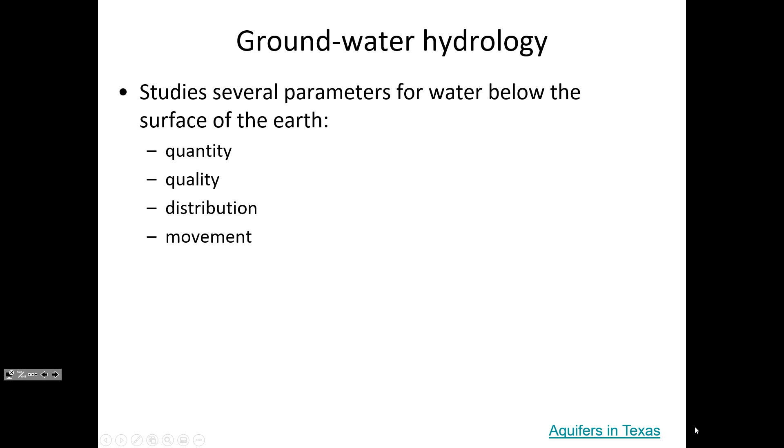And what's significant about subsurface hydrology is that there is so much fresh water underneath the Earth's surface that it's a really important source of water, both for domestic use but also for industrial purposes, and even in some cases commercial use like cooling at power plants. And so subsurface hydrology would concern itself with the amount of water that's available, sometimes the quality. There are applications of subsurface hydrology that look at how pollutants that have seeped underground will move from place to place because of the movement of the water that carries them.

And just like there are important models used in surface hydrology to link together the relationship between rainfall quantity and runoff amount, there are also models in subsurface hydrology that link together things like rainfall recharge and how the groundwater table and the aquifer movement from place to place varies over time. And so there are finite element models that divide the underground environment up into a three-dimensional mesh, and there can be different properties for each element in the mesh. They'll assign different hydraulic conductivities, and then they'll look at the flow of water in and through those boundaries.

One of the big problems that has emerged is the fact that groundwater tables are getting lower across the United States as agricultural users extract more water from aquifers than the surface is recharging.

And we'll look at a couple of YouTube videos today just to introduce us to the subject of subsurface hydrology, and I think you'll notice that a consistent theme of those videos is just concern over the fact that as populations are growing, the amount of water that can be extracted from underground is declining because the areas that have good availability of infiltration are reduced. When you have a lot of impervious area in a watershed, then that reduces the amount of water that can get into the subsurface, and so that's taking the infiltration lower than it was before.

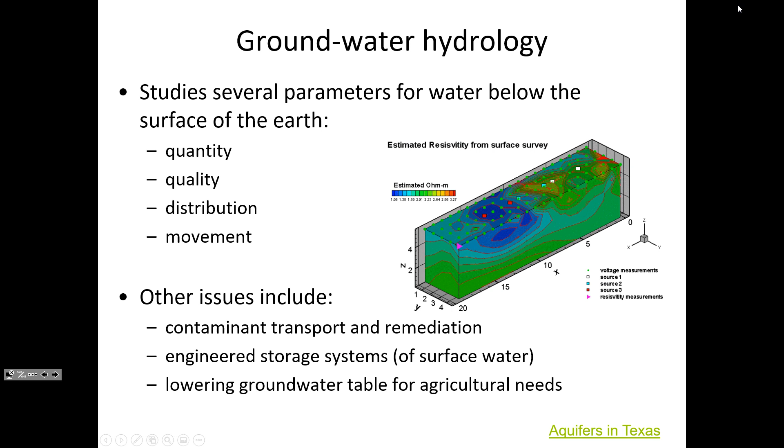And then another aspect of it is that there is a lot more pollution getting into the underground aquifers than there was previously, and so that sometimes makes it a challenge if you're going to use groundwater for drinking. In some past years, maybe it would be possible to take water straight from a well and put it into a distribution network, but it's becoming increasingly common that groundwater that's under the influence of a polluted surface water has to be disinfected, where that may not have been necessary in the past.

All right, so this first video is made by the Texas Water Development Board, and it talks about aquifer issues specific to Texas, which is kind of a good indicator for where a lot of the rest of the country is going, because Texas has growing populations and, as a southern state, is maybe more exposed to variability in the climate than some other places. And there are some aquifers, particularly in El Paso, where I remember reading the doom and gloom articles about how the aquifers were just about completely used up. As much as 5-10 years ago, they said there's only 5 or 10 years left, and they're finding ways to draw that out and reduce the dependency on the aquifers.

But the point is, Texas has some really important issues, and if we can learn from what they're doing in Texas to manage water availability and preserve aquifers, then a lot of the other places that are less threatened can benefit from that experience. So let's watch this video.

Okay, we're going to look at something similar in the slides that follow, but it's maybe not as clear as it is here, so I wanted to pause and show you that what we're actually looking at is two different kinds of aquifers. This aquifer is confined, meaning that there is a layer that's relatively impermeable both underneath and above. And so this is just soil that has water in it. It's a conceptual diagram. If you were to actually have a side view, it would just look like soil because the water itself is clear, it's not blue. Here's the ground level. Now this is soil that has some water in it, but the pores aren't fully saturated, and this is where the pores are fully saturated.

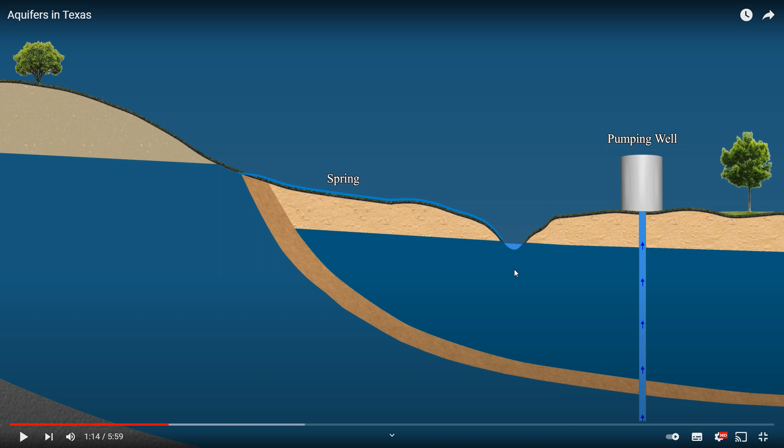But this is a confined aquifer, and then what's above it is an unconfined aquifer. And so there can be multiple layers. If you go downward 2-3 kilometers, you may pass through different aquifers that are on top of each other, and then a very thick layer of rock, and then beneath that may be another aquifer. And so we can't just think of there being a single aquifer or a single aquifer layer at any particular spot on the map, because the important regions go downward, and there can be these different layers. All right, so let me continue the video then.

Okay, one of the things that it talked about in that video, just very briefly, was brackish groundwater. Is anybody familiar with that term, brackish? Let me see if I can get to the spot where they were discussing it. It just came on screen so quick.

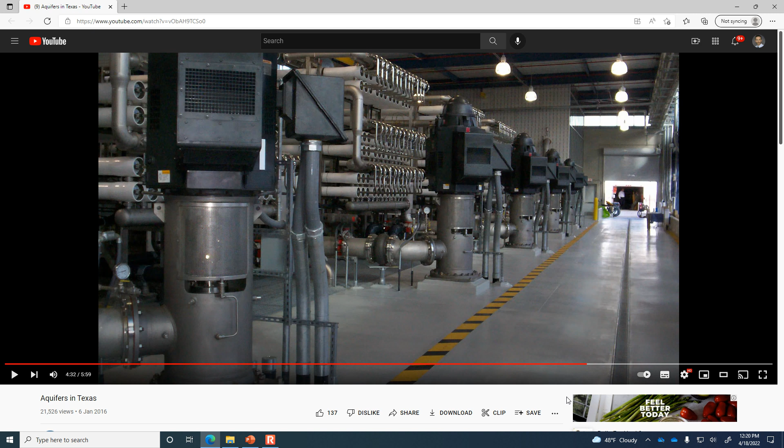Well, here it is. Okay. These tubes are reverse osmosis units used in desalination. And brackish water is water that has high salinity, typically sodium. And a lot of that sodium comes in from saltwater intrusion.

If we look at the map of the major aquifers that they've got in Texas, this Gulf Coast aquifer, you'll notice, is just up against the Gulf Coast. And when you're pumping groundwater out, then some of the water that comes back in is from the surface, infiltrating down, but also the seawater can penetrate inland. And so, especially in coastal areas, saltwater intrusion is a real problem, where if you're pumping out the fresh water, then that creates a low point in the groundwater table, and water from the sea will begin to penetrate.

And so coastal communities that rely previously on groundwater can suddenly find that their groundwater is no longer fresh, that it becomes salty. And so it's not an all or nothing proposition. It's not like suddenly they find it has the same salinity as seawater, but over time the concentration of salt in the groundwater begins to increase, and there may come a point where they have to start extracting it.

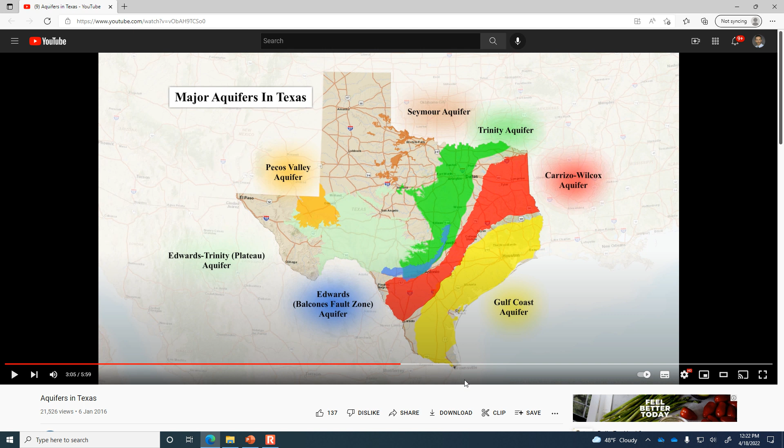And so reverse osmosis is one of the approaches to do that, where they'll use high pressure pumps to force water through membranes that have very small diameter pores, and the pores are small enough that it'll allow water molecules through, but it will filter out salt. And so it's very, very expensive, and just one of the issues that they're trying to avoid when it comes to preserving the productivity of the aquifers.

So if you look at the overall quantity of water on Earth, most of it is in the oceans and isn't easily used because of the salt that is in seawater. And of all the fresh water that exists on Earth, most of that is also not usable because it's in ice caps, meaning, it's fresh, but it's so far away from where the people are that it's not generally considered practical to use water that's in the ice caps, or water that's in glaciers is permanently frozen.

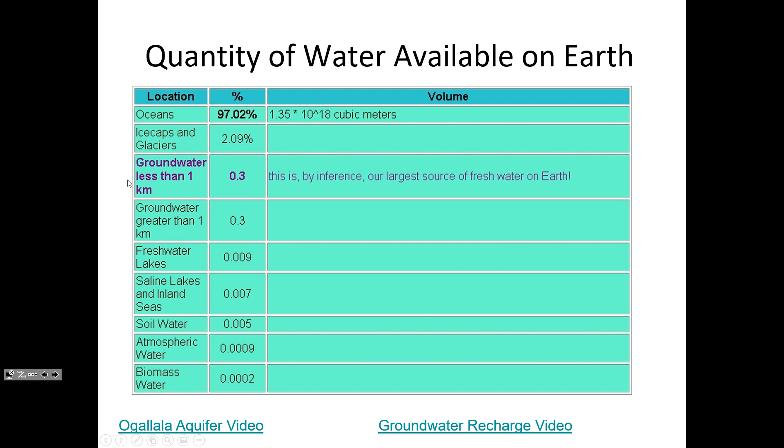And so most of the fresh water that we can access would be water that's relatively close to the surface. And so 0.3% of the water in Earth's environment, if we think about it as a control volume and we're looking at inside the atmosphere, where is the water that we could use, only a tiny fraction of it is closer than a kilometer to the surface.

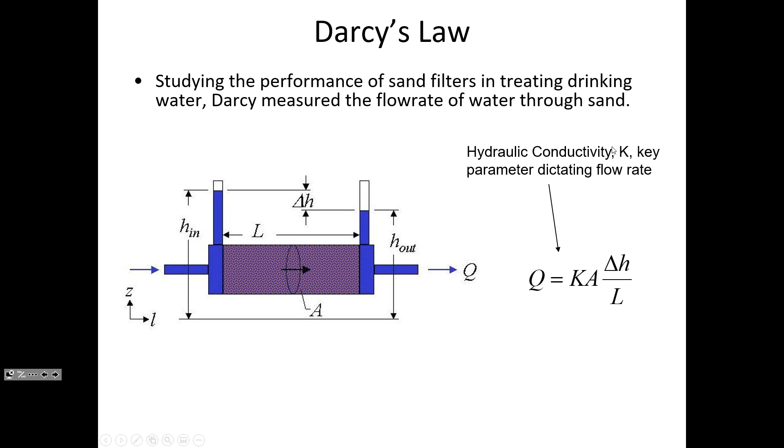And so this proportionality factor K is also important when we talk about well equations, when we try and predict how much water can be extracted from a well based on the shape of the cone of depression, the shape of the water surface as the water is approaching a well. So this hydraulic conductivity, which we've seen before, will be an important factor when we look at the well equations.

In hydrology terms, the cone of depression is the water table which gets lower as you get closer and closer to a production well. There's two different kinds of wells, a production well or an observation well. If you're digging a hole in the ground and you're just keeping track of the water level at that location, that would be the observation well. But a production well is where you're extracting water from the aquifer at the location.

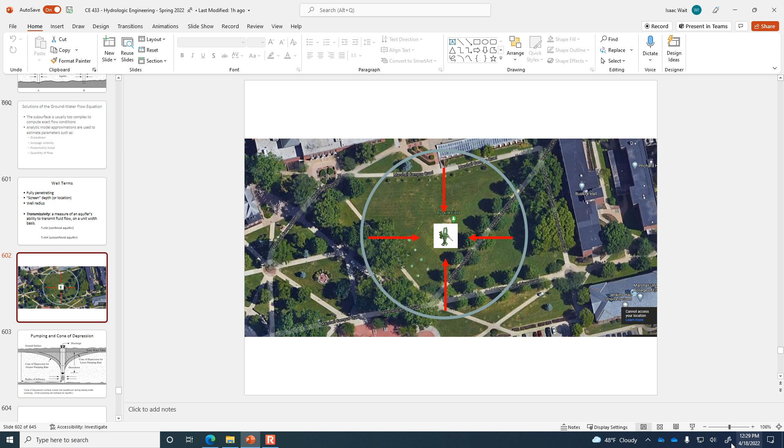When I talk about the radial movement of the water, if we had a well that was set up in Buskirk Field, maybe just one of those old-timey hand pumps, then it would be bringing water to the surface, and to be able to have more water as you continue pumping, the water would be moving towards the well in all directions. So it would kind of have a circular

influence, and the closer you get to the well itself, the lower the water table is, and that's why the water is moving from the outside towards the center. Remember, water flows downhill, and that's what the cone of depression is: the downhill movement of water. We wouldn't see in a free surface a water surface that's quite this steep, but because it's a porous medium and water has to seep through small diameter grain voids, we can see a relatively steep slope.

And what we're able to do is measure a certain distance away from the central axis of the production well. We can find out what the depression looks like, how much of a drawdown there is at a certain distance away, and then at another location. And if we have the drawdown at two locations, then we have formulas that will allow us to predict the rate of flow that you can get from a well by observing the cone of depression.

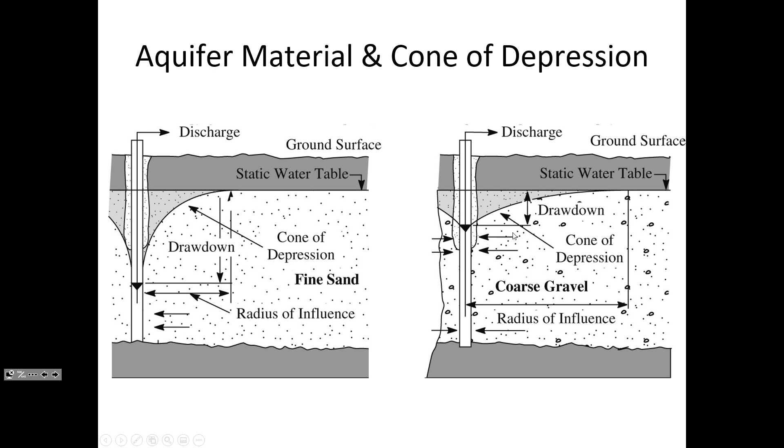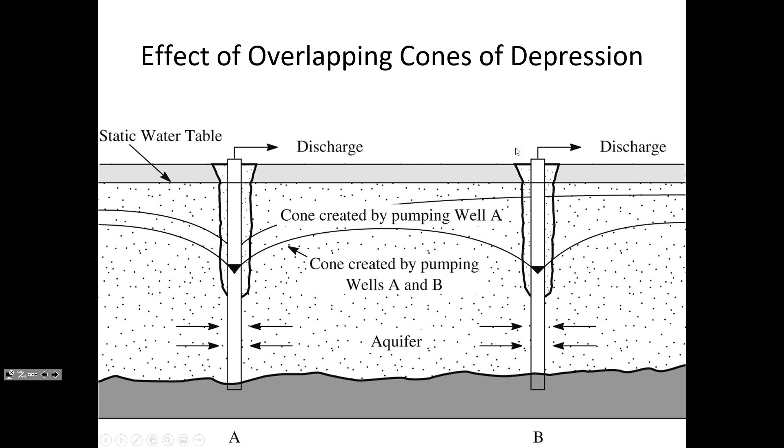And when you have two adjacent wells that are both bringing up water, there can be overlapping cones of depression that cause the drawdown to be even lower than it would otherwise be. In both of these wells, the static water table was here at some elevation below the surface. If you were only pumping well A, it would bring the cone of depression down a certain distance, but the influence of having an adjacent well would bring it down even further.

When we have wells that are extracting water, a fully penetrating well is one where it goes all the way through the entirety of the aquifer thickness. And so we're assuming that water is free to move towards the well through the entire aquifer thickness, because we've screened, meaning that there's openings in the pipe casing so that water could enter the well at all of the different elevations.

The radius of the well is important because, remember, I mentioned that the equations we're going to use to predict the flow capacity for a well look at this drawdown at a certain radius away from the well. And one of the locations that we can measure the drawdown is at the well itself, which saves us from having to have two separate observation wells. We can have a production well and one observation well, and just with those two, predict what the flow rate is able to be based on the drawdown that we're observing.

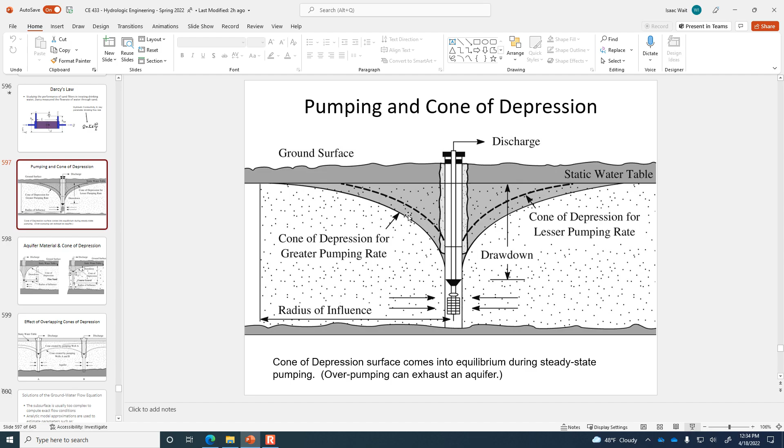Now, I've already refreshed your memory about the parameter of hydraulic conductivity, but a related term is transmissivity, which is where you take into account the thickness of the aquifer and its hydraulic conductivity. And so here, whether it's a confined aquifer or an unconfined aquifer, you could talk about the transmissivity of the aquifer, and K has units of length per time. So hydraulic conductivity would usually be centimeters per second or meters per day.

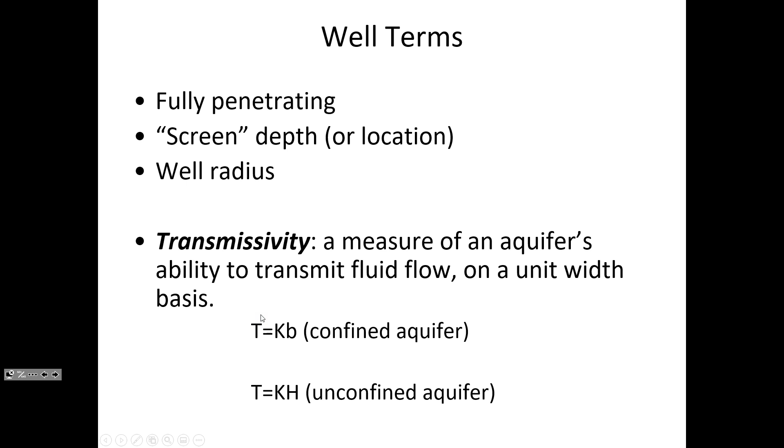It's a speed, in other words, where the aquifer thickness is going to have units of length, and so transmissivity is a flux. It has units of length squared per time. And so it would be meter squared per day or centimeter squared per second, potentially. But we just simply multiply the thickness of the aquifer by the hydraulic conductivity, and then we get the transmissivity, which will go into the equations we use for trying to describe the shape of the cone of depression.

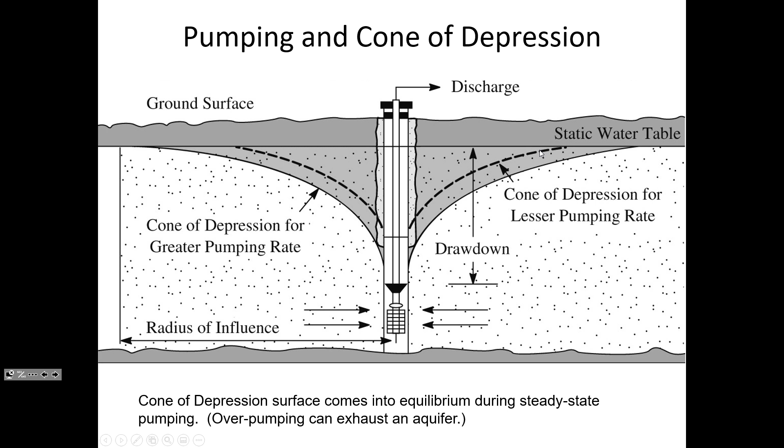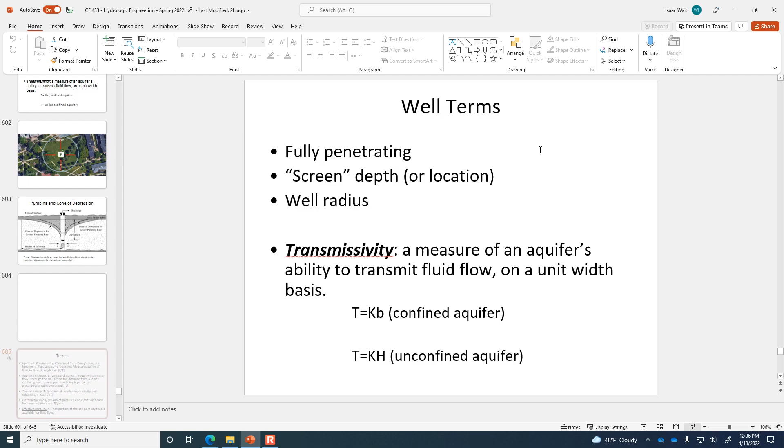We've talked about hydraulic conductivity, the thickness of the aquifer, transmissivity. In a confined aquifer, we're not actually observing drawdown of the physical location of the water, but we're observing drawdown of the piezometric head. I don't have a marker. Let me go to this side view of this aquifer. So if we started to extract water from one of these wells pretty consistently, then if it's an unconfined aquifer, you'd see the physical location of the water starting to draw down.

But in a confined aquifer, it won't be the water surface that draws down at first. It would be simply a reduction in the pressure of the water in the vicinity of the well casing. So this term here, the piezometric pressure, is the sum of the elevation and the pressure head at a certain location. And so inside the confined aquifer, you'll remember back to fluid mechanics, we talked about piezometers.

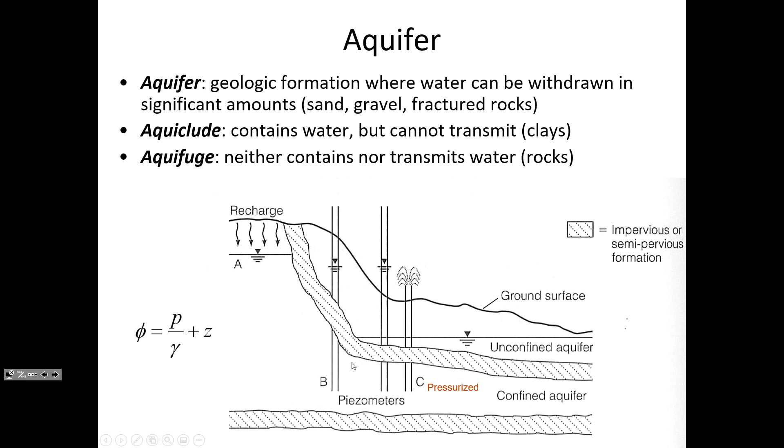A piezometer, if you connected it to a pipe, is a way of measuring the pressure, and you're puncturing the pipe and allowing the water level to rise to a certain elevation, which represents how much pressure there is inside the pipe. And so the same thing is true with an aquifer, that you can puncture it, connect a tube of some sort, and the water level will rise, indicative of the pressure inside the confined aquifer. So it will be that piezometric pressure which is reduced in a confined aquifer, where it's the physical water height that will be reduced in an unconfined aquifer.

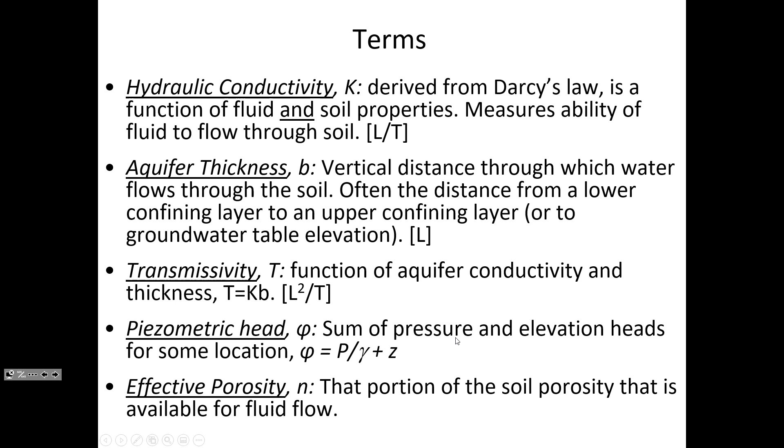And you'll remember the difference between porosity and effective porosity, that some pores may not be interconnected, and so although a given soil may have lots of voids, it's the interconnected voids that are effective for porosity that we have to keep track of when we're talking about movement of water through the subsurface.

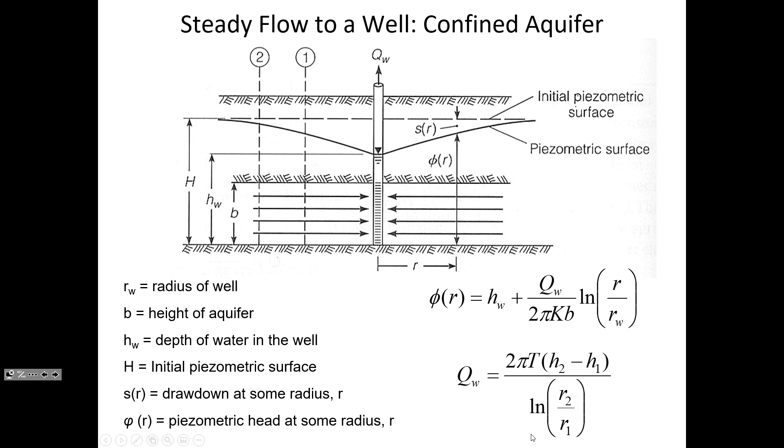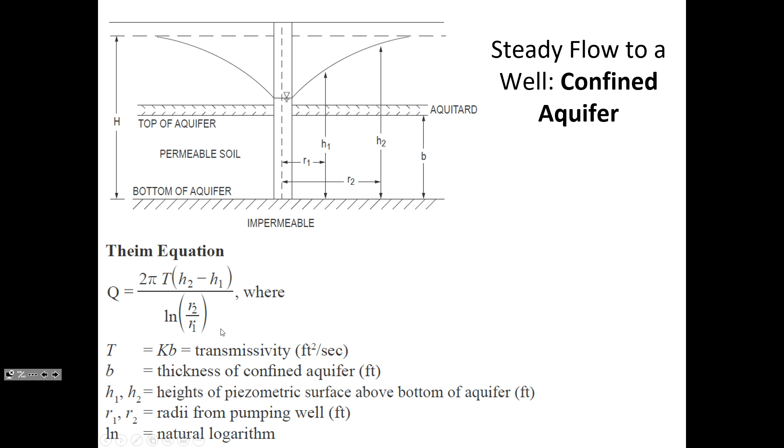So this is a really useful equation and one that I've written lots of questions on the FE exam related to flow through wells. So if it is a confined layer, it's called the Thiem equation, and this is what it looks like in one of the previous versions of the FE review manual. It's basically the same as this other slide. I wanted to show you that it is in there. Let's take a look at this example. We have just 9 minutes remaining, but let's see if we can get the first of these two questions.

It says we have a confined aquifer with a hydraulic conductivity of 20 meters per day, so that's K, a thickness of 6.6 meters, so that's B. So we know K and B and multiply the two together and that gives you T. An initial piezometric surface of 14.53 meters above the lower confining layer, so H is 14.53. And we're trying to solve for the flow rate Q that would cause the piezometric surface to be 13.85 at a radius of 40 and 14.31 at a radius of 85 meters.

Okay, so this is not describing it in terms of drawdown. This is describing it in terms of the H, so that's just easier for us. We don't have to calculate H from the drawdown. So location 1 is the one that's closer, so that's radius of 40. So R1 is 40, H1 is 13.85, and then R2 is 85 meters, and H2 is 14.31. Okay, so with these parameters described, we know T is K times B. We know H2, H1, R2, and R1.

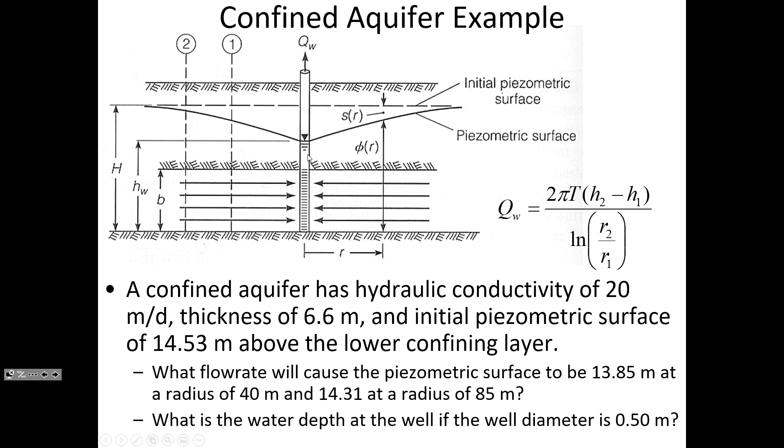And that's why the water is moving towards the well casing: it's high pressure further away, low pressure the closer you get towards the screened well. And by screened, what it means most of the time, let's say this is a PVC pipe, there's just small little perforations in the PVC pipe. It could be holes that are maybe 1/2 millimeter in thickness that have been sliced into that pipe, and it allows the water to seep in to the well casing and the soil will stay on the other side.

Okay, so doing the substitutions here, 2 pi times the transmissivity, which you can see is 132 meters squared per day, and then the difference in the height of the piezometric surface. I got 506 cubic meters per day. Did anybody else get that same value? See a couple of nodding heads.